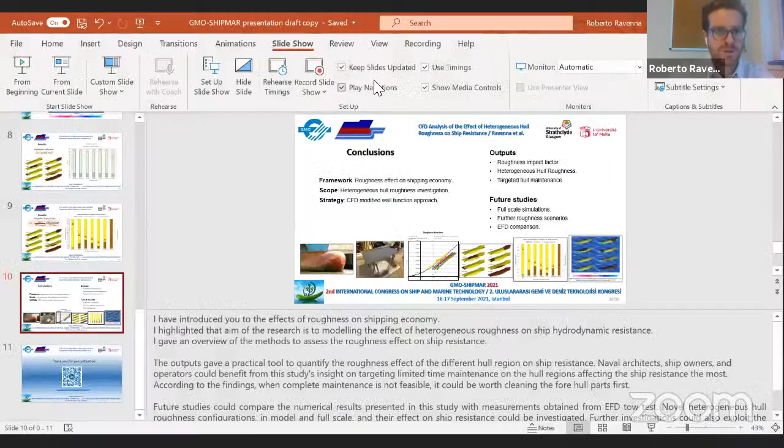So the floor is yours, Mr. Ravenna. Here you are. Thank you. Thank you very much for the great introduction. I will share my screen and my presentation today. Just give me a moment, please. Can you see my screen? Yes, everything is okay. Okay, that's perfect. So thank you very much.

Well, today I'm going to present a CFD analysis of the effect of heterogeneous hull roughness on ship resistance. I would like to thank my co- I hear that recording is in progress. Okay.

I'll start again. So thank you for being here. I'm going to present a CFD analysis of the effect of heterogeneous hull roughness on ship resistance. And I would like to thank for the support all the co-authors from University of Strathclyde and University of Malta. And this study is part of the VENTuRE project, Horizon 2020.

So I will go into the contents of this presentation, which are mainly to give an overview of the roughness effect on ship economy. And then I will move into the aim and objectives, which are related to heterogeneous hull roughness. The methodology, as in the title, is a computational fluid dynamics study. And then I will give the best of the results we obtained, especially with the definition of a roughness impact factor. Then I will go into the conclusion and recommendation for future studies.

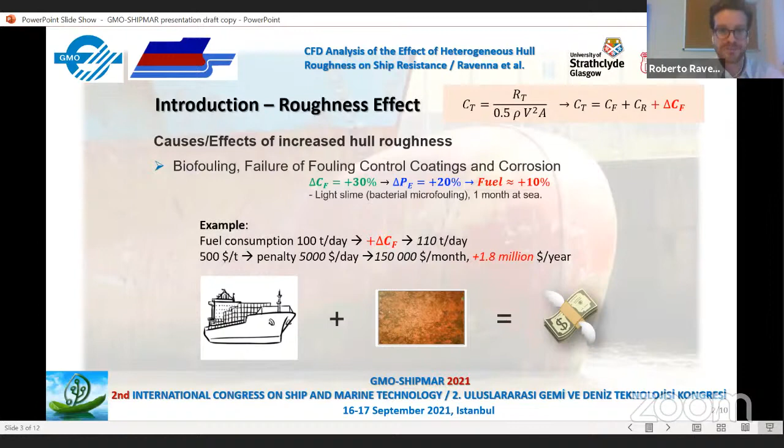And it is estimated that with a slime or just a light failure of these fouling control coatings, you can get a fuel increase of 10%, which on one ship could mean 1.8 million a year, and if we scale up to the entire fleet of ship owners, it is a lot of money. So we want to address this added resistance.

But despite the wide literature available, there is still a limited understanding of the hull roughness effects on ship resistance. Also, the hull surfaces are often treated as uniformly rough, and there is no heterogeneous hull roughness study for any container ship, which carry most of the goods nowadays around the world. So eventually there is limited support for ship owners in hull maintenance decisions.

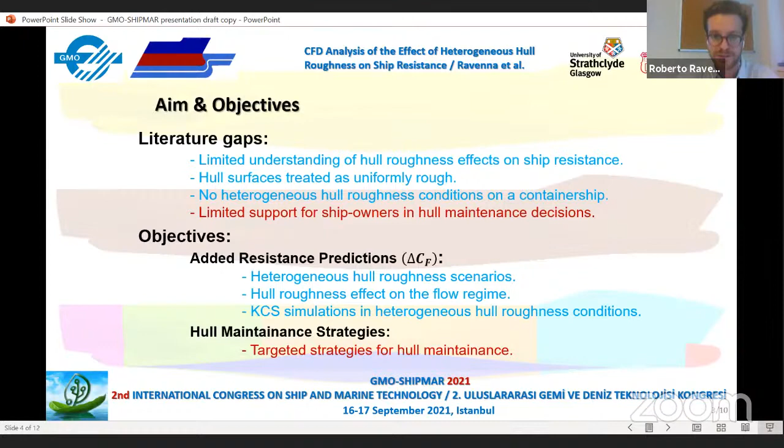Therefore, the present study aims to fill these gaps, conducting a heterogeneous hull roughness scenarios investigation on the benchmark KCS hull. And this way it could be possible to investigate more how roughness affects the flow regime. And eventually the final aim would be to give some extra tool for ship owners to decide on targeted strategies for hull maintenance.

Just jump into the methodology. So there is a solid literature within the turbulent boundary layer theory, which has been developed to assess the effect of increased roughness on ship performance. Recent studies demonstrated that CFD can accurately predict this effect on ship resistance, provided that the roughness function models, delta U plus, are known, and these are characteristic of each surface.

In this study, the roughness function model was developed and validated from a previous study of one of the co-authors, and it was developed from towing tank experiments on a flat plate with a specific sand grain roughness, which tried to mimic a light rough scenario.

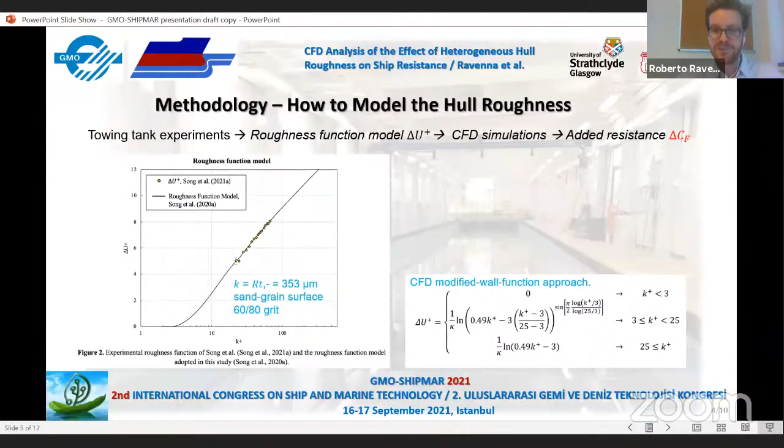Then the methodology has another slide to elaborate on the simulations that we conducted. So once we implemented this roughness function model in a modified wall function approach, we decided on different scenarios with different coverage, which in this case,

can you see mine? Yeah, I think so.

So different scenarios, and as you can see, we will describe them and also compare with the full smooth and full rough cases. And the simulations were all conducted in STAR-CCM+ on the benchmark KRISO container ship in model scale. Of course, the findings will try to help the ship owners in the decision making.

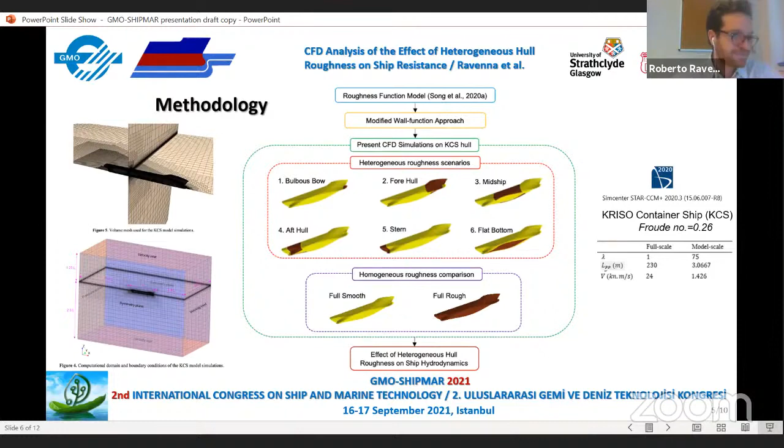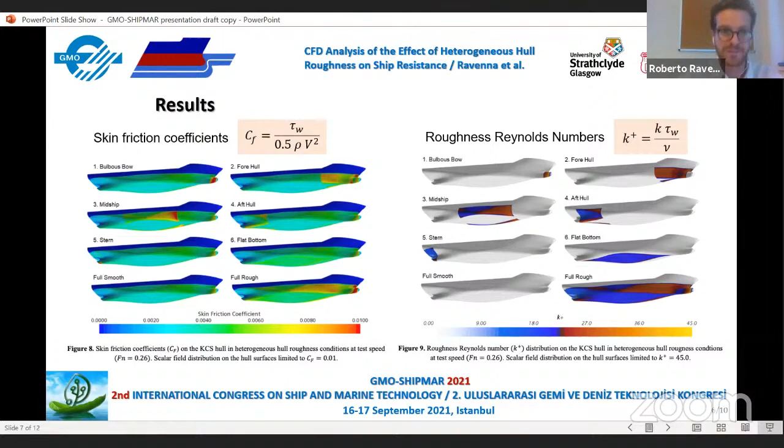And it is also known that in the fore part of the hull of ships, there is a more significant impact of the wall shear stress on the skin friction and roughness Reynolds number. And this is due to the active transition between the flow and the fore part of the hull. So accordingly, again, in this slide it could be observed that the bulbous bow is quite red, and it means that the skin friction there is really high, while on the aft regions there is very little of these characteristics, confirming that the fore parts are more influencing the roughness, the ship resistance.

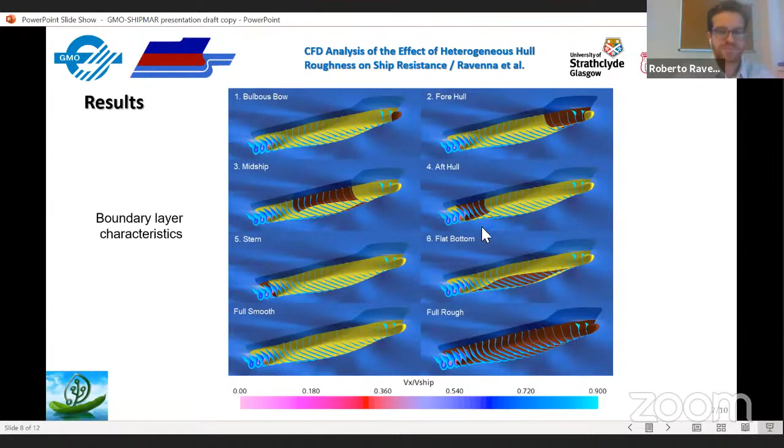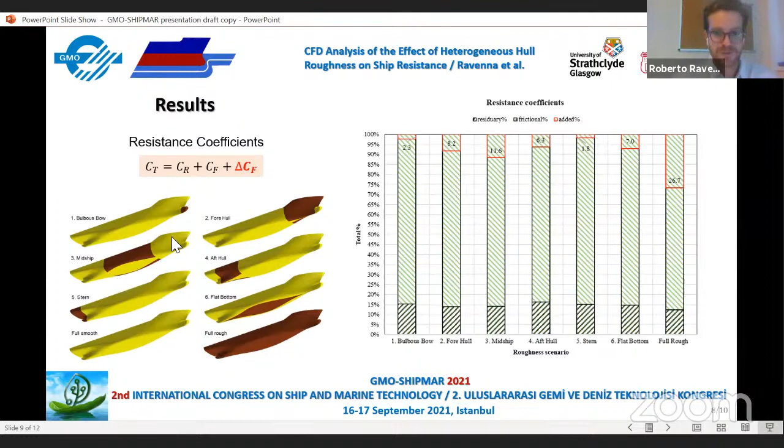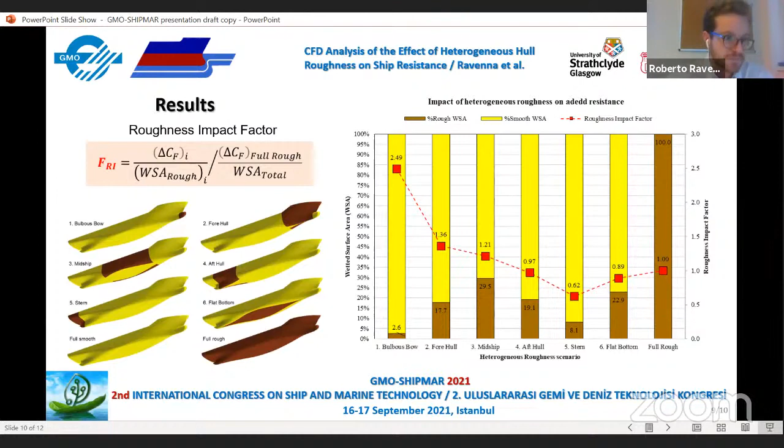And on the other hand, as I mentioned before, the stern has the least impact on the ship resistance characteristics. This gives an idea of where we could start looking when we would like to clean this hull. And of course, due to the way this roughness impact factor has been defined, for the full rough conditions it is unitary, evidently. And so the diagram highlights these characteristics. And that's all I wanted to show. I'm sure you'll probably have questions.